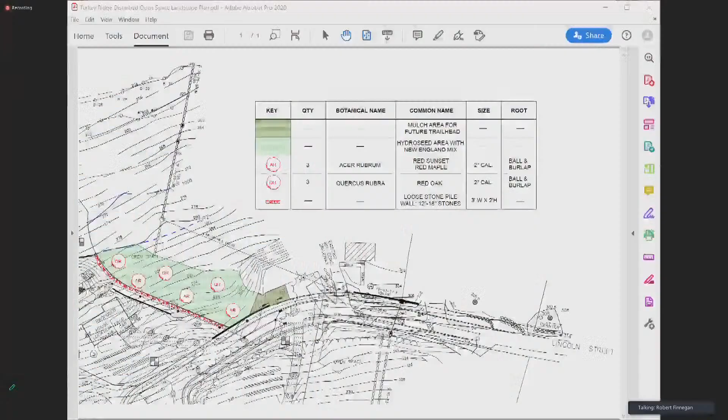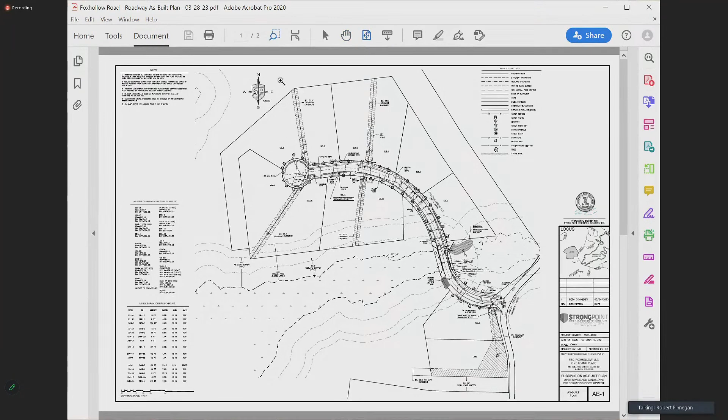It was only first raised as an issue for all of us when we received the BETA report, dated March 8th of 2023. That was amplified by the letter we got on the 28th of March at the selectmen's meeting, which Mr. Gelsich has indicated he shared with you, that talked about the issues particularly noted in item number 4 of that DPW letter. But the swale, John, if you could show them between 11 and 12. It's the one on the other side of the road. That's 6 and 5. Thank you. It's this one right here.

So it's this swale right here, and construction is currently underway on lot 12. We met out there on site today with the contractor for the builder, the homeowner who is on the Zoom tonight, and the homeowners collectively. I represent all of the 10 Fox Hollow Road homeowners. There's also a contractor involved to address the punch list of items that both Beta and DPW have identified. So we have a group of us out there, and our goal, frankly, is to do everything we can to comply with the DPW letter in a timely manner so we can go before town meeting and have the road accepted.

One of the questions asked, I believe by you, Mr. Chairman, was timing. We have expedited timing. We have asked for and received some bids for the work. It's about a 2.5 day job to get the swale put back in the condition that it needed to be in, that it was in prior. The reason the swale was modified, altered, is because the contractor building lot 12 was not comfortable with his excavators going around the house on the side toward the swale. There's no other way from the other side -- you'd be going onto conservation land, and that just isn't a possibility. So it was a safety concern, very frankly, for the operator of the excavator.

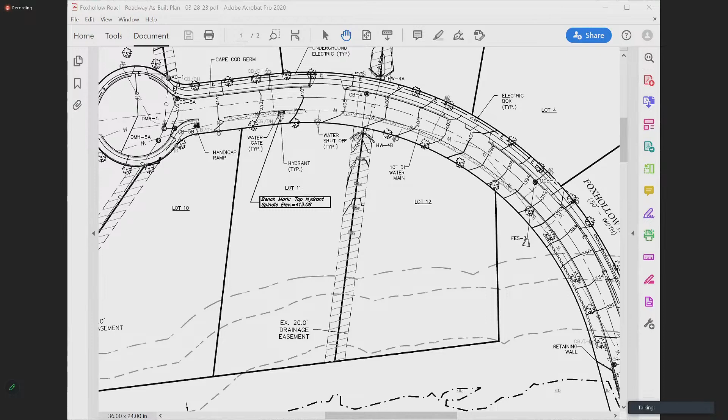Great. So if the board members take a look at the letter that the DPW wrote, it's from John Westerling, dated March 28th. I really want to highlight the second to last paragraph from the bottom. John, are you able to share that? Thank you, oh fabulous, okay.

Item 4 is of particular concern because of the potential damage to private property, and I do not want to see the town inherit that liability. So he's rightfully concerned.

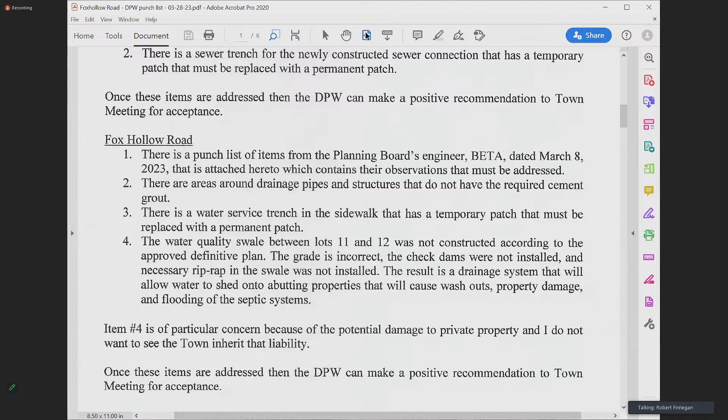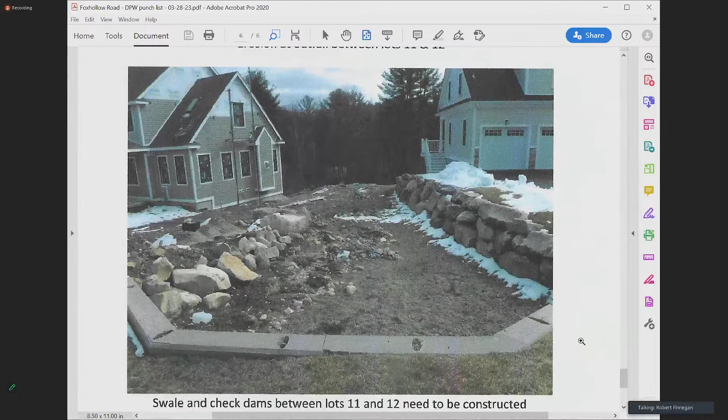Mr. Gelsich, could I ask you to flip to the very last page, which shows a photograph of this area, please? Thank you. This bottom photograph, thank you, that's it right there. I got to learn how to do this. This is what it looks like now, and you can see that lot 11 is on your right-hand side. The house under construction on lot 12 is on the left-hand side.

And the swale, as it was originally constructed and accepted by the town, continues to be in the original condition as it abuts lot 12. It's only in how it was altered as a result of the contractor building the house on lot 12 that you can see the differences. But the gradient is clearly still away from the road.

I'm not sure, I believe that, and the contractors talked about this again today, that I'm not sure the water flow is toward the basement. I do think it continues to go straight down, although not as direct and correctly as it would be when this is completed and done in a final version.

But if the issue for the town is liability, if that's the issue, because we're asking that the town accept this and that the town do a taking for this — none of the issues that this swale presents are in any way part of the land that the town will be taking. So the town will have no ownership for that. Mr. Westerling's concern seems to me is liability.

And what these homeowners have agreed to do, what I have proposed to town counsel, is that they sign an indemnification to the town indicating that if there is any issue or damage, they will indemnify the town, so the town will inherit no liability. In addition, both the homeowners and the contractor building this property have agreed to the additional imposition of a condition on the issuance of the occupancy permit that this swale be completely restored to its original condition, or better.

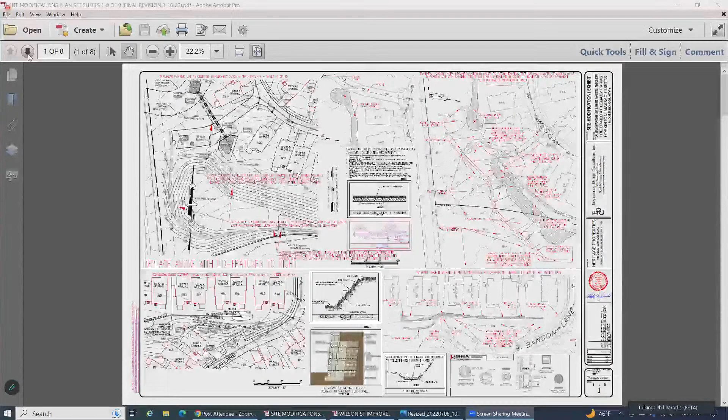The wall behind 75 to 89 Weston Lane, which is adjacent to the Ashland town property and their lagoon. So we were not there when they constructed it. There's been a lot of back and forth as to how it was constructed, and they have an engineer saying it was constructed in accordance with engineering practice. I don't, again, we weren't there.

So this wall is, and I don't know that you can do anything about it now, but I guess our concern as professional engineers is, I don't want to own it.

Understand, okay. So if I can, Mr. Chair, yes, so we had, it's Randy Bragdon, a professional engineer with Souhegan Valley Engineering. Randy's specialty is retaining walls, that's why we brought his firm in to look at this.

As I described to the board members who were on site when we had our site walk, this was a controlled fill. We used a structural engineer to do geotechnical inspections for us, and we had geotechnical reports because we built buildings on top of that controlled fill. All those buildings were part of that work activity.

And at the limit of work was where we placed these boulders, and they're very large boulders, as you can see in the pictures here. Randy did inspect this, looked at it, and said that this is a very sound structure. We've given you a letter to that effect, and that's part of the record.

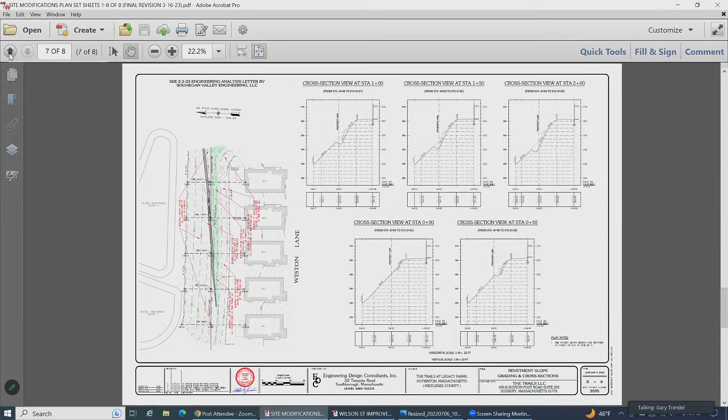Okay Phil, any other points of concern from your review? I do want to note that the Conservation Commission has approved the plan. I think the offsite swale is still an outstanding issue, but I don't think it affects the site plan as you previously approved, so I don't think that's an issue. That would still remain a Conservation Commission issue, but it's offsite.

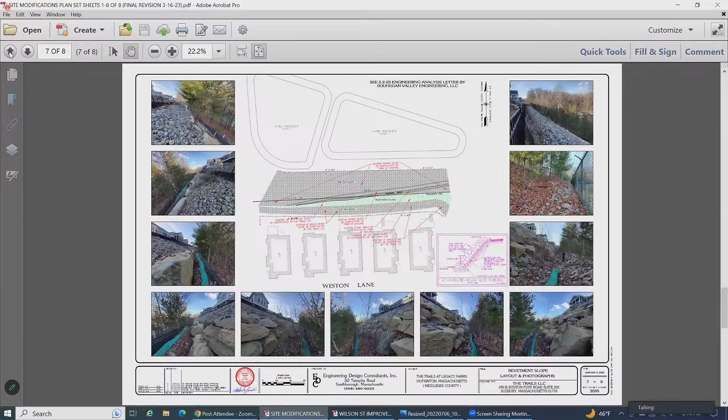Okay, so it sounds like the primary thing for us to review here is the sidewalks. Peter, why don't you bring it up just so you can see it.

So it's in this view, the right viewport where we're showing. I'm not sure if that still shows in the center of the screen, but I hope it does. Here at the entrance, we will have the sidewalk in the northeast quadrant. It'll come along the southeast quadrant to the clubhouse and connect with that entrance area. And there is a paver sidewalk here to this entrance.

We just don't want to—it would be easy for me to take this and extend it to the road here, but I don't think it's prudent as a design engineer. I don't want to exit pedestrian traffic here. I would like them to come across and be here. This added 75 feet is important when people are traveling 50 miles an hour, which is not the posted speed, but is the observed speed I see people driving on Legacy Farms North. That concerns me a great deal. I would rather they cross here.

There is not a sidewalk on the north side of Legacy Farms North, it's on the south side. It's extremely important to get that pedestrian traffic a little bit further west so they're a little bit more protected as they cross the road.

Okay, so on that one, all you're doing is adding some additional sidewalk on the opposite side of the street. Correct. And then as far as the detail for the curbing, at the lower portion of the plan, we provided in lieu of—if you will accept—the relationship of the sidewalk being at the back of pavement versus the grass strip, which is what the residents in the development actually were asking, to eliminate the sidewalk. We did not support that alternative.

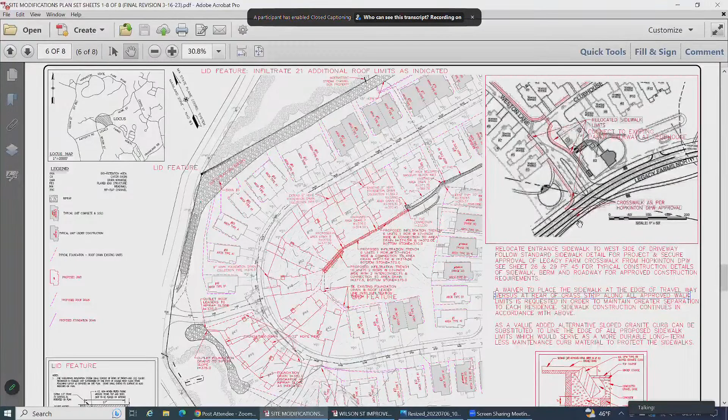I think there was an Ed that had his hand raised. Ed, I don't know if you're still on. It was a mistake. Oh, okay. No worries, Ed, well, we'll talk to you in a little bit. Thank you.

All right, so I think we're ready to move forward here. And I do not have a printout in front of me, so I apologize as I look away and just remind myself of where we are in the public hearing outline.

Just to remind folks, the decision criteria of which we're evaluating here: the planning board will be reviewing and approving if it finds that the site plan complies with the master plan special permit; two, the site plan meets all the requirements and standards set forth in the article, the master plan special permit, and applicable design guidelines; three, the convenience and safety of vehicular and pedestrian movement within the development project and in relation to adjacent areas and public ways is ensured.

Four, that substantial adverse potential impacts of the development project have been adequately mitigated. Five, adequate mitigation has been provided with respect to any conditions impacting on-site safety, whether such conditions are created on-site or off-site.

So I think that's what we're reviewing on, and I see someone from the public has their hand raised. Ms. Kellogg, if you want to go ahead and unmute yourself and ask your question or make your comment.

Thank you, Mr. Chairman. I just, as a member. Sorry, can you just state your name and address first please? Nancy Kellogg, 17 Weston Lane, The Trails.

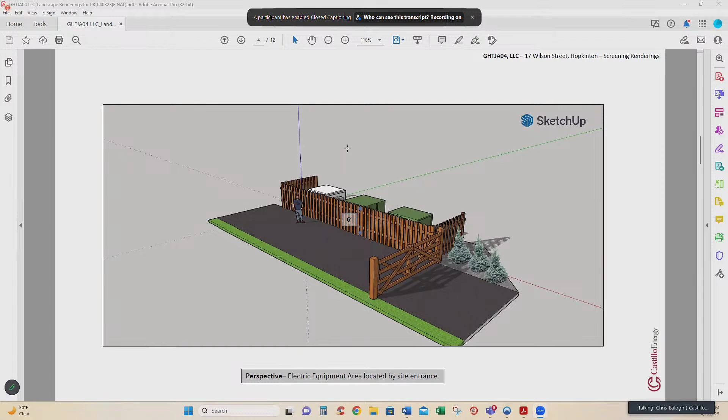Rory can show you a couple more slides here to show the view from the street. This kind of details the last presentation that we've had. So this is the bulk of what the changes were, the bulk of what we had discussed previously. We're still incorporating the 750 series fence screening, the industrial grade, which I think helps the most for the screening of the abutters' view, including the trees. But this is kind of the front work that we've modified. So that's basically the bulk of the changes that were done.

All right, thanks, Chris. Two quick questions from me before I open up the board. We continue to talk about the rocks and boulders in the disturbed portion of the buffer zone, and I don't recall seeing a note acknowledging that on the plans. It's definitely in the letter. In the letter, it talks specifically about the removal of those boulders, and we put that into the letter that it would be done.

At the last meeting, we had some discussion on the boulders that are parallel to the access road. The goal was to provide loam and seeding, bringing some grass and new life to that area. So as we're moving boulders, we'll do our best to get some of those cleaned up and removed, based on Ed's comments.

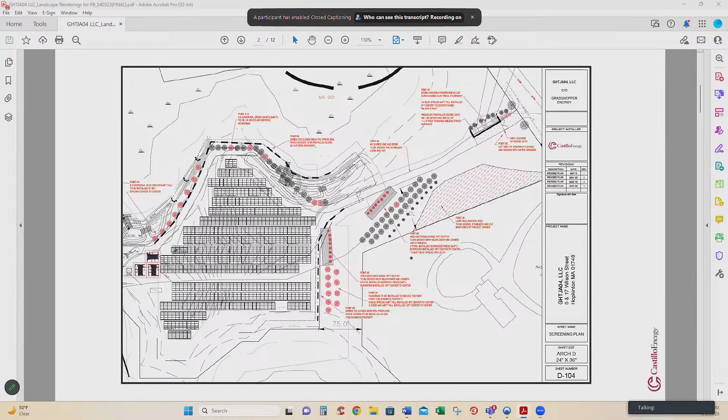My hope is it can just be looped in with the periodic site maintenance. Ahmed? I've been muted. I see he's unmuted on our end. But Ahmed, we can't hear you. All right.

Matthew, do you have a recommendation there? I don't know, I'll just share my thoughts. I'm a little cautious because it's not meant to be manicured lawn. This to me is not something that needs to be mowed via a lawn service of some kind. I think the idea here is that it returns to some natural state. That's my interpretation of it. I just don't have any idea as to what frequency that might need.

I don't either. Chris or Rory, could you propose a recommendation for that? But bi-weekly is not unreasonable. Maybe not every week, but every 2 weeks. Okay, bi-weekly is reasonable to you? I think that's a little too frequent.